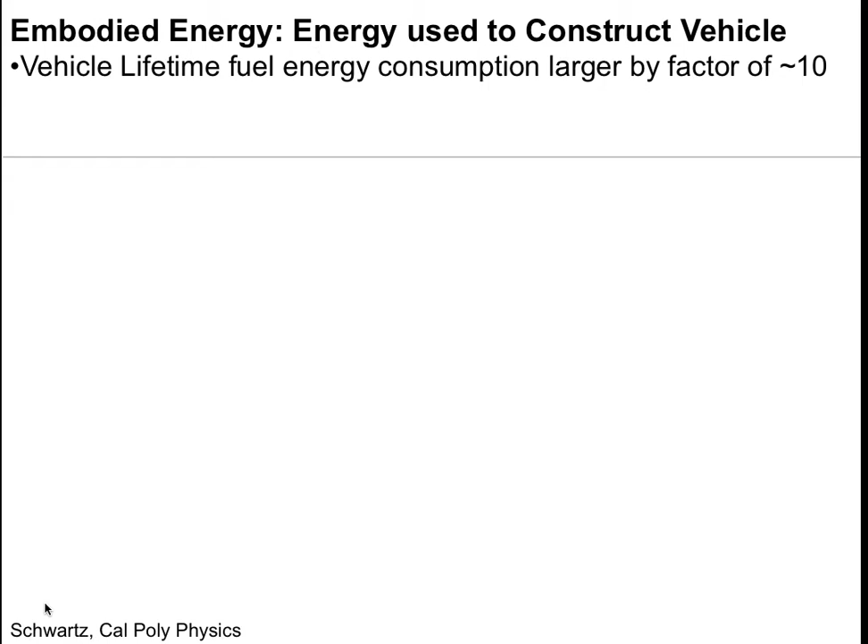So you're at the cocktail party, and someone says, I'm not going to buy a more fuel-efficient vehicle because I'm concerned about the energy used to make a new vehicle. This is called the embodied energy. But the embodied energy of your car constitutes a very small portion of the full carbon footprint of your automobile, 90% or so being due to the burning of gas. This is usually the case for all energy converting technologies such as a light bulb, a heater, or a motor. And the analysis shows here that the embodied energy is about equivalent to one year's worth of driving.

That is, unless you drive very, very little. Most people drive on the order of 15,000 miles a year. So what this means is if you drive at all, investing in a fuel-efficient car is going to reduce your carbon footprint.

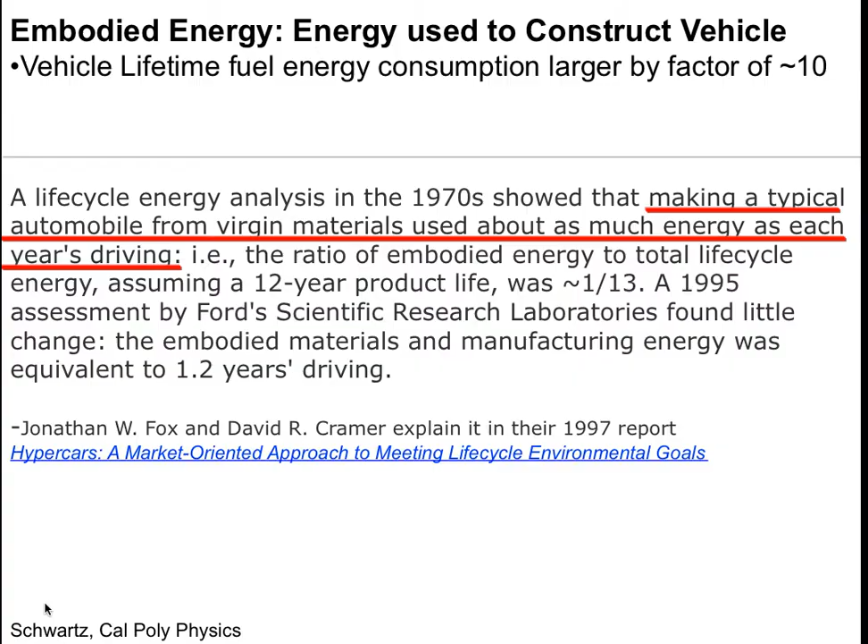So although the average car lives for about 18 years, its productive lifetime is about 11 years only. So if we want to get everyone to use electric cars, we're going to presume it's going to take about 11 years for most people to start using a different car.

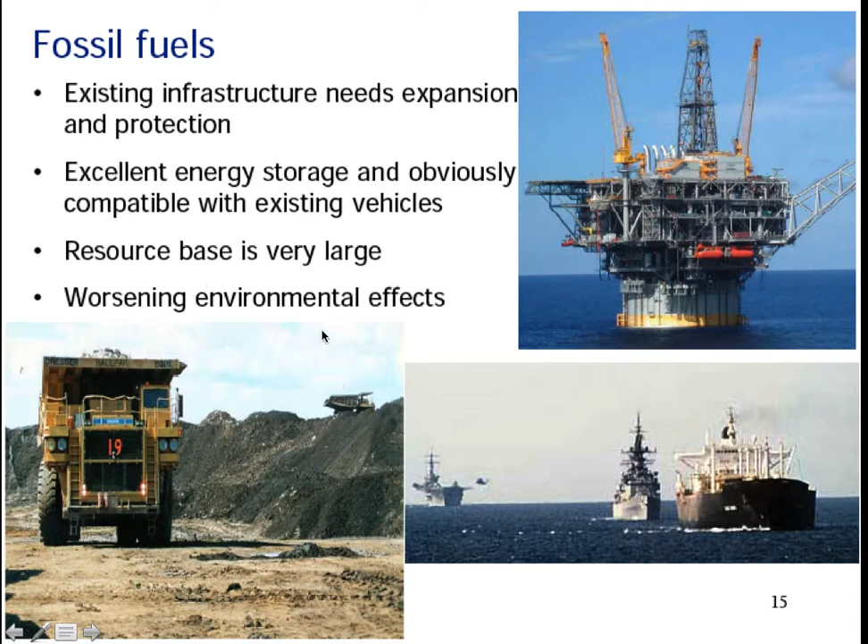Okay, so let's take a look at some technologies. What do we know about fossil fuels? Well established, works great. The resource base is large but dwindling, and there are a lot of environmental effects as we try to get that harder to get oil. This is where it all is. Most of it's in the Middle East, unless we consider the tar sands in North America, up here in Alberta. We've used about half the accessible oil.

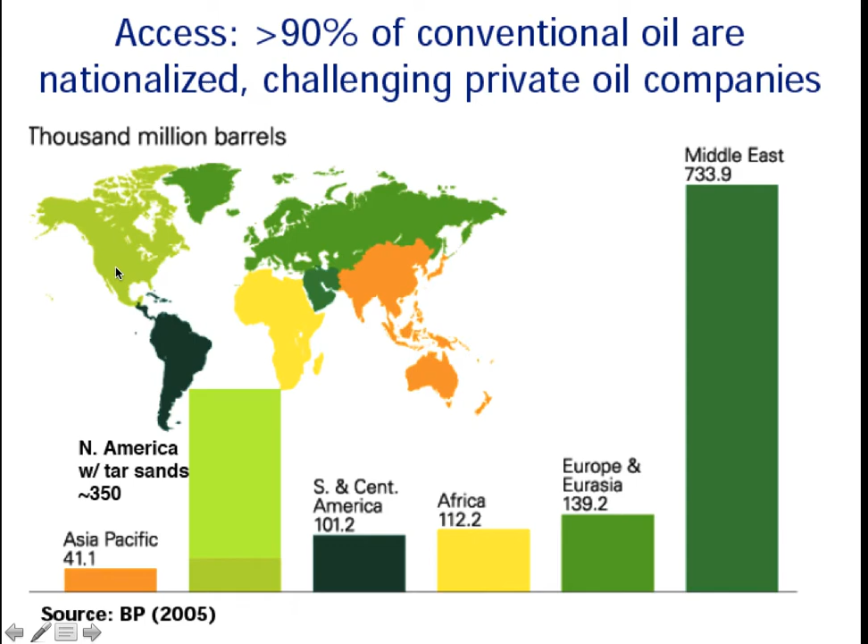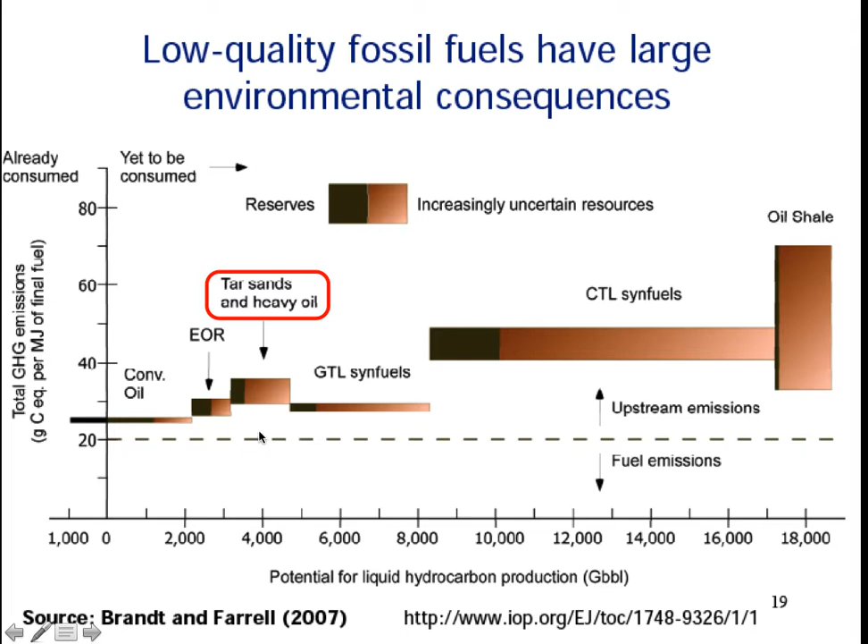We can extract oil that's more and more difficult to get to by using fracking, for instance. It just costs more, and it also costs more in the environment. Where we can see tar sands, the upstream emissions is more than half the emissions due to burning the petroleum after you've refined it. The United States could do more to improve the efficiency of the automobiles on the road.

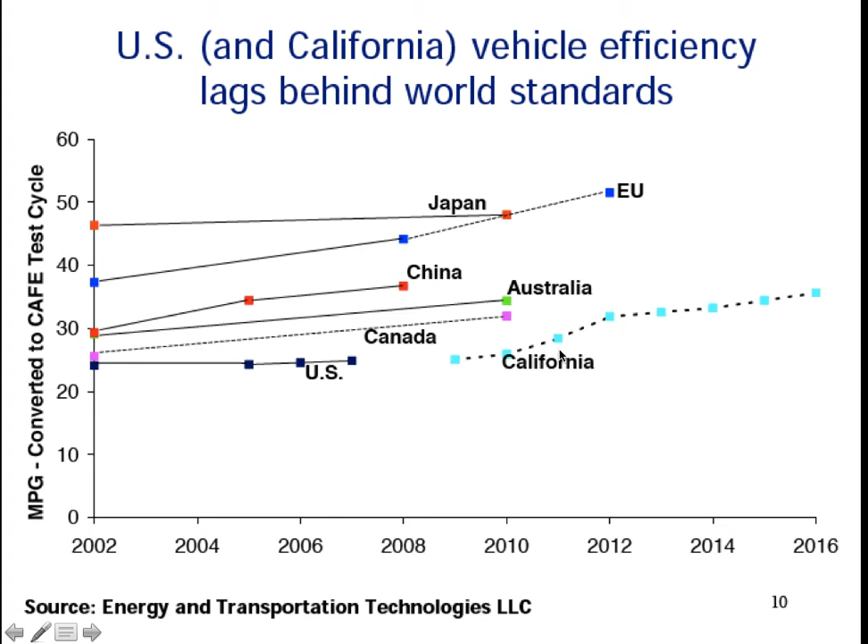And we see this is starting to happen in California, and the United States has since picked up since Obama was elected. Then you ask yourselves, well, if we don't make efficient cars, what are we putting our energy and time into? We can see here the green curve represents the relative miles per gallon. All of these graphs start at 1 as just a relative term. So we can see the fuel efficiency improved greatly around 1980 and then leveled off and actually even dropped. So where did all that technological innovation go?

Well, we improved the horsepower, we made the vehicles bigger, and we made them accelerate faster. And so if we want to, we can make much more efficient vehicles if we don't worry about being a muscle car, if the performance and the horsepower are less and the weight is less.

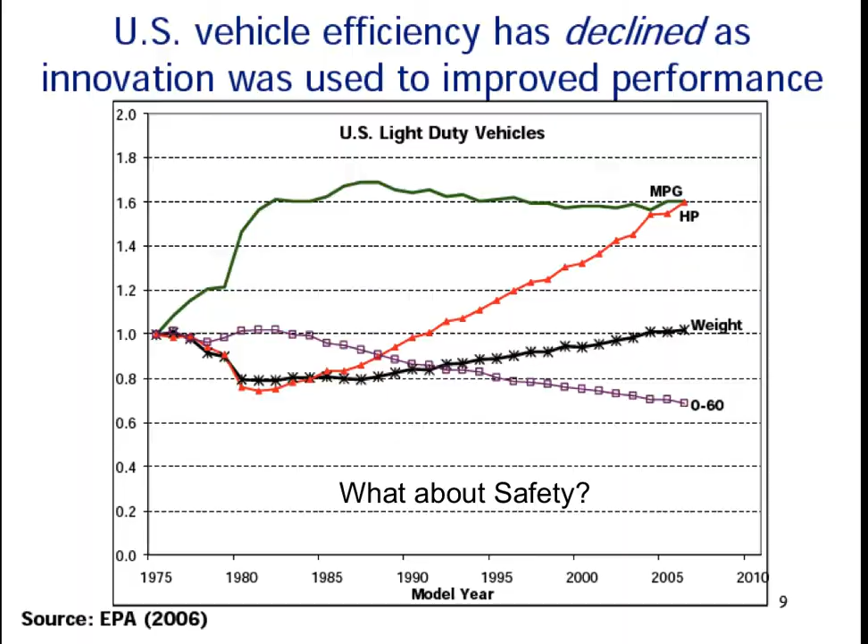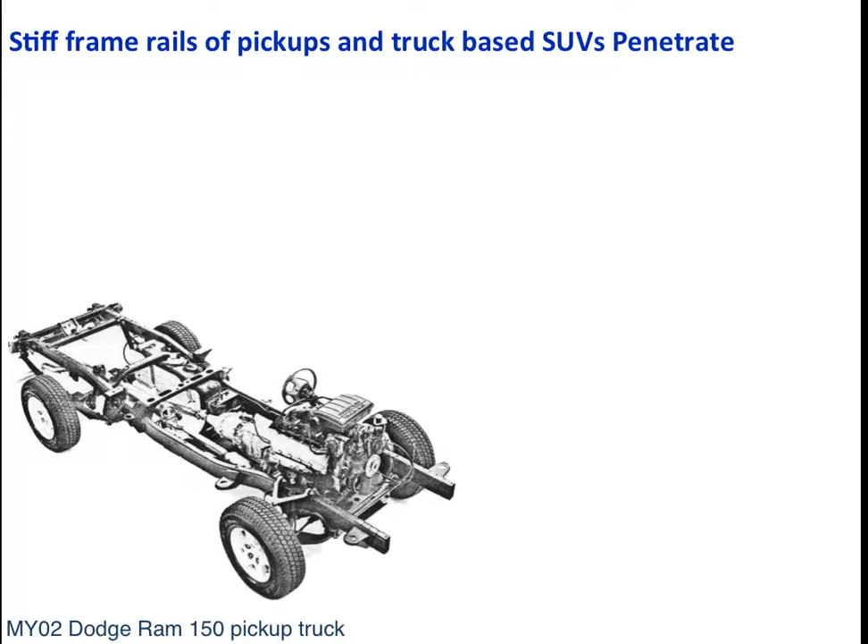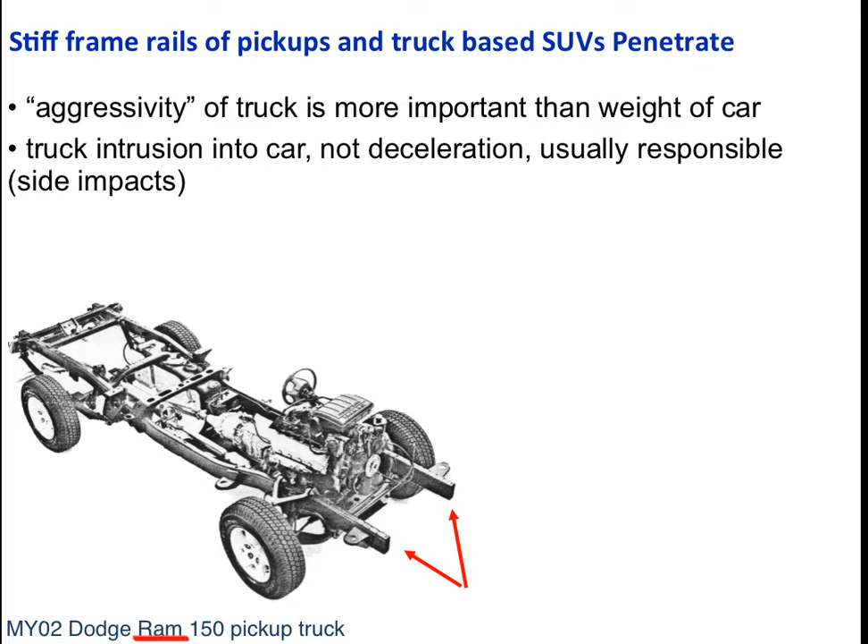And we investigate, why is this so? Most of the deaths are not actually due to deceleration, but because you actually get impaled by the frame that penetrates the other vehicle. What's interesting is the Dodge Ram—this is the frame. Take a minute and try to find your own car here.

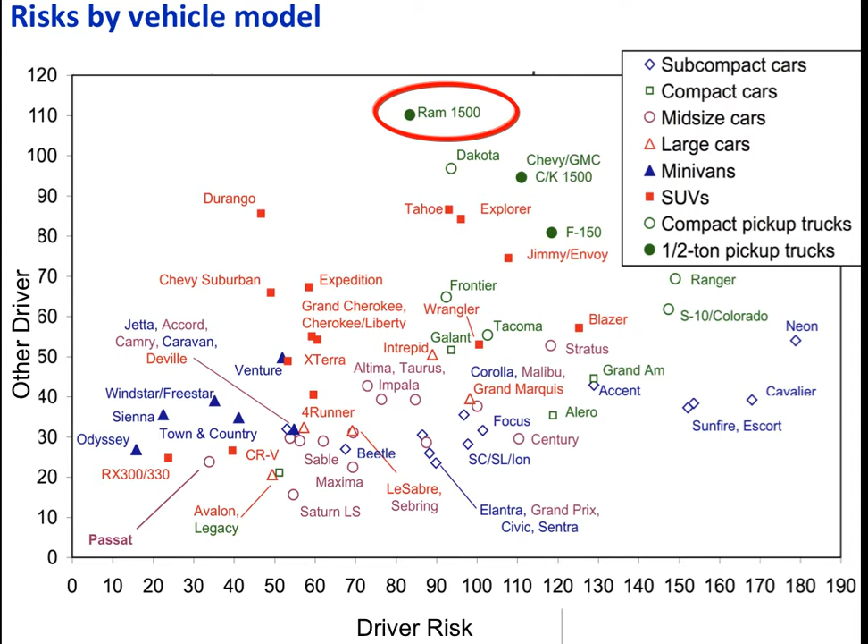So you need to store energy to drive a car, because cars require quite a bit of energy, and generally we've relied on liquid fuels. But batteries give us the ability to use electric motors, which are much more efficient with the use of energy than the internal combustion engine. There are 3 different kinds of batteries we'll look at real quick here.

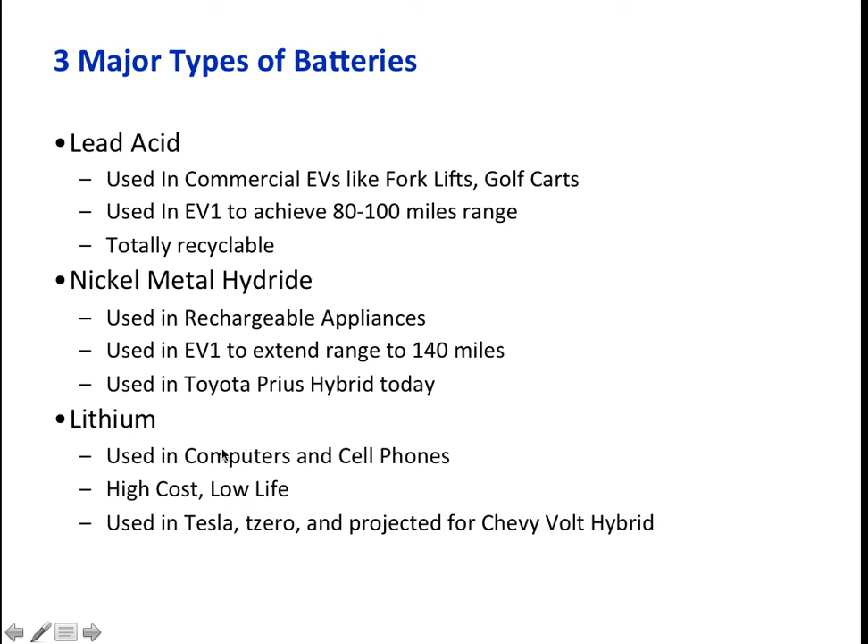This is how the batteries stack up against each other. The lithium-ion battery stands out for a number of reasons: first, it has considerably more energy density than the other two, but costs 10 times as much as the lead-acid battery. Although it doesn't last as long, we can have more cycles of charge and discharge before the battery's dead. Lastly, it's interesting because there are many different reactions that can be associated with a lithium-ion battery.

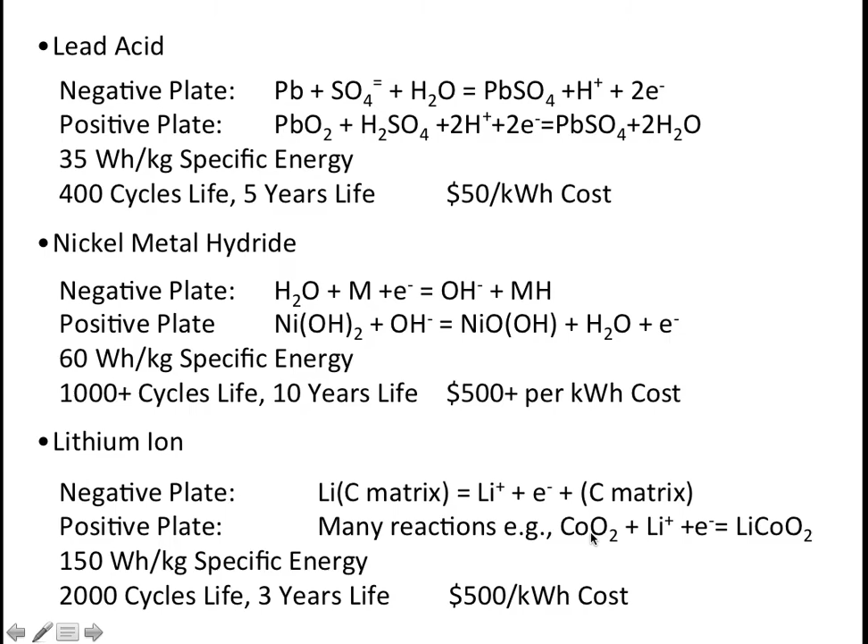A mobile lithium ion can move between the negative and the positive terminals. It has a lower energy state in a carbon matrix than it does in any number of compounds on the positive plate. Let's take a look—here the lithium is incorporated in this compound, but can break down, releasing the electron and moving through this electrolyte to become incorporated in a lower energy state with the carbon compound.

The electron is not free to move through this electrolyte, and therefore accumulates on this electrode and becomes negative. When we connect that up, we can drive current through a motor, for instance. It's rechargeable by means of driving the electrons backwards through a larger voltage, making this plate extra negative, which will attract the lithium ions back again.

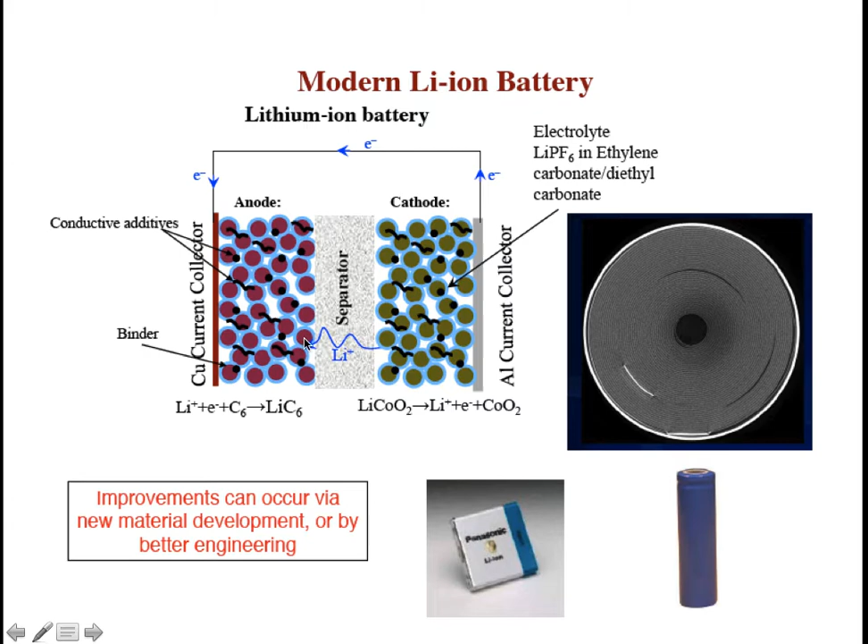We want all these layers to be very thin, and this surface area to be very large. We take that film and roll it up like a fruit roll, and our lithium-ion battery is a cylinder. If it's very thin, we can have a large surface area which allows a lot of current flow. The danger then is when the separator gets very thin, we can have a short between the two, which will destroy our battery. That's ultimately what kills your lithium-ion battery.

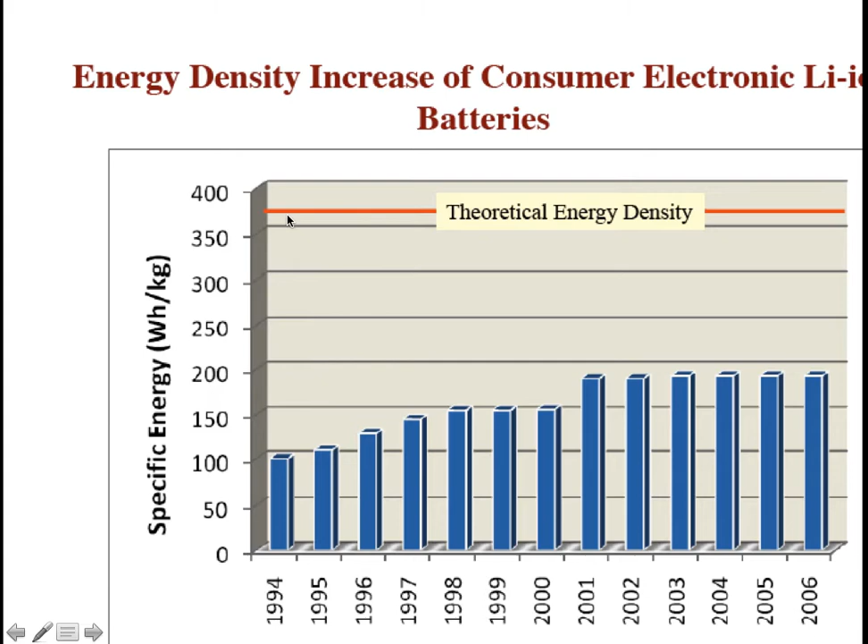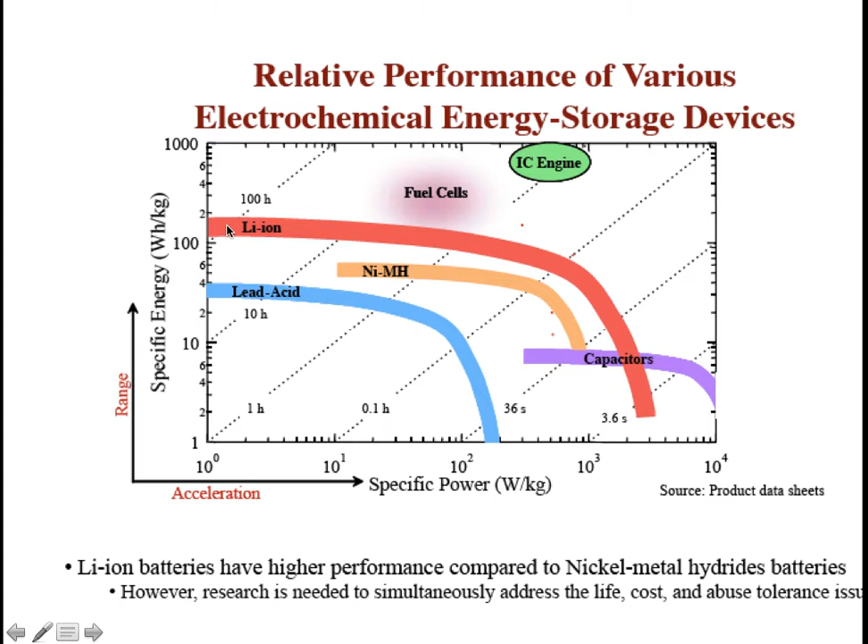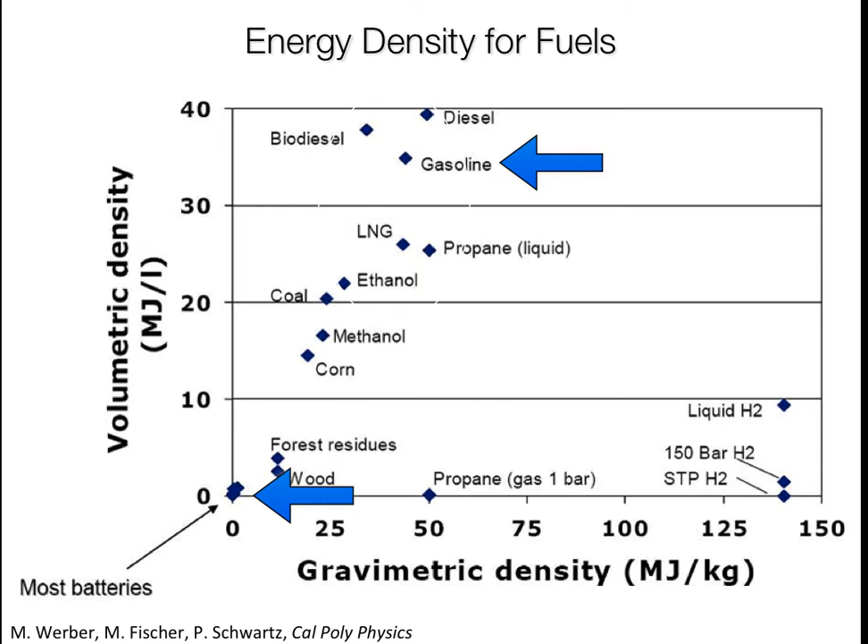It is very misleading, and so we did some research and published a paper addressing the issue of energy density. Chemical energy density is the amount of energy stored, how much heat you can generate per mass of fuel. But you can't drive a battery and you can't drive a gallon of gas.

You have to convert that thermal energy into mechanical energy, and you're going to need an engine to do it. So you need to multiply by the efficiency of conversion. Furthermore, it's not just the mass of the fuel you have to carry around, but the whole engine and transmission. The conversion efficiency for the internal combustion engine is 10 to 20%, whereas for electricity it can be 95 to 99%.

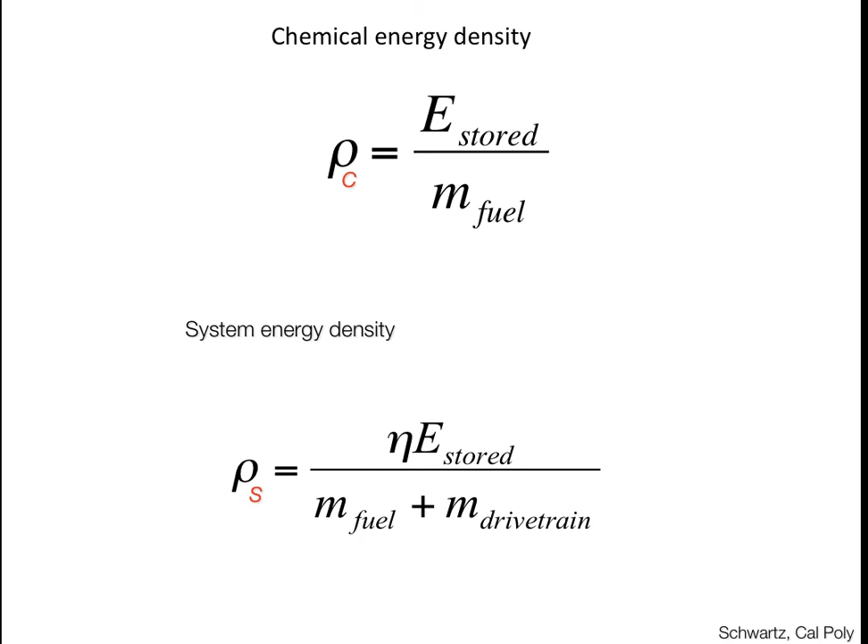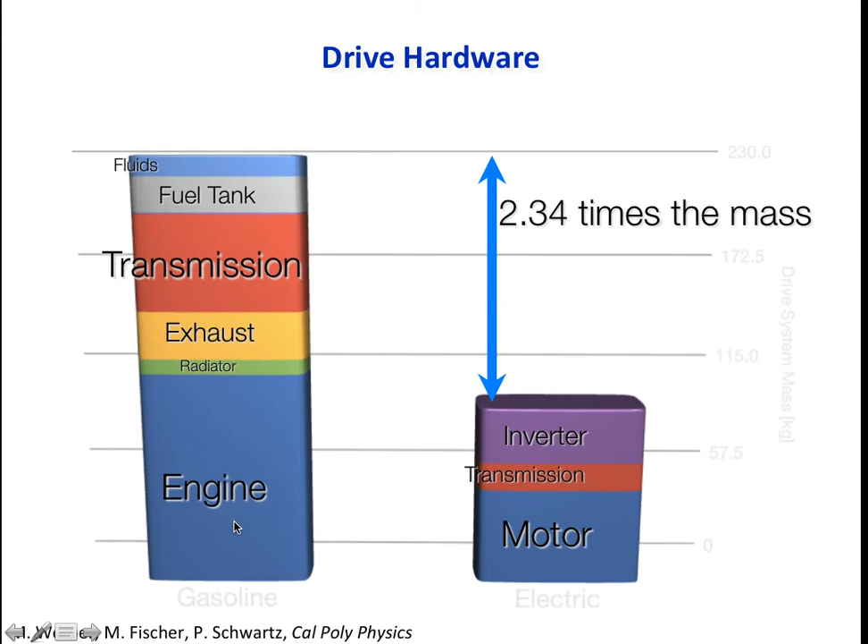Additionally, internal combustion engines have a much greater mass than an electric motor. For instance, the Tesla has a motor that's 70 pounds - you could hold it in your hands. So we compared the Lotus Elise to the Tesla Roadster. They're made from the same frame, almost identical cars, except this one has an internal combustion engine and this one has an electric motor and a battery pack. We compared the mass of the drive system and found that the internal combustion engine had a much greater mass than the electric motor.

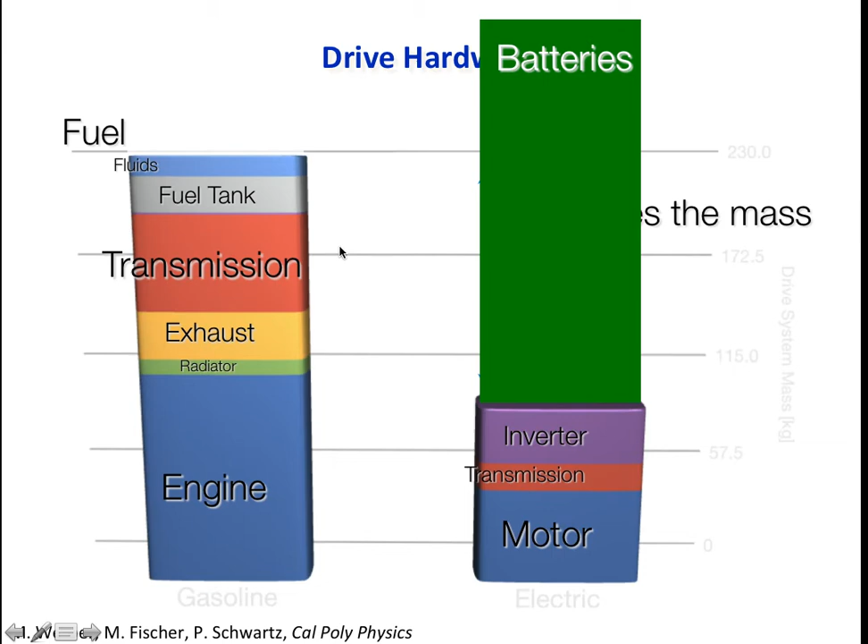The major amount of mass is carried in the batteries, but you can determine how many batteries you have, so your electric motor system could have less mass or more mass than your internal combustion engine depending on what range you wanted, how far you needed to drive.

The same result was found when we compared the cost of driving an electric car with the cost of driving an internal combustion engine. The major cost for an electric car is in the range that you want. If you don't need to drive 400 kilometers, your electric car is going to cost you considerably less to drive than an internal combustion engine.

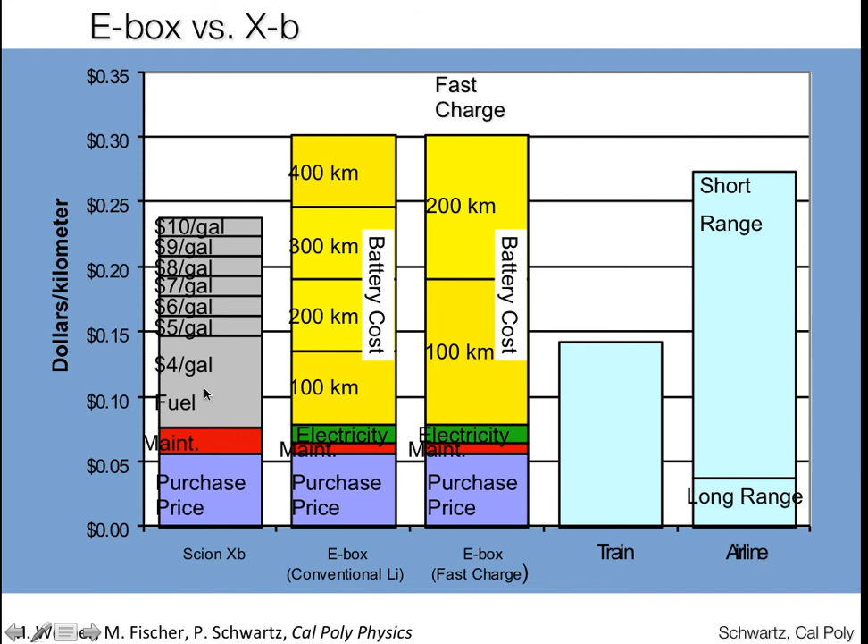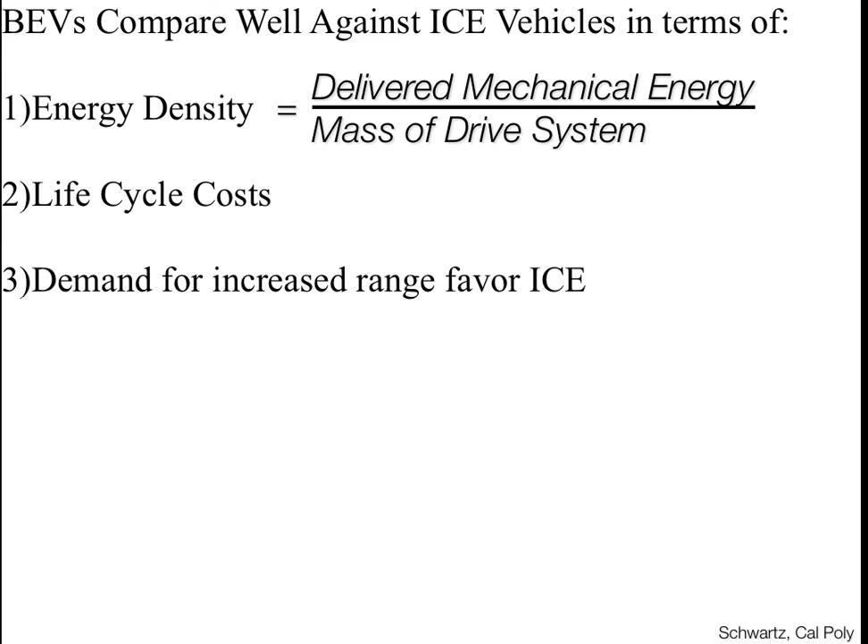If you need to drive very far, there are a number of other ways you could do it. You could take public transport, borrow a friend's car, or drive your other car, because Californians, for instance, would have 5 or 6 or 7 cars. So battery electric vehicles actually have a very good energy density compared to internal combustion engines. They have lower life cycle costs, but if you need a large range, if you need to drive very far, you're going to want an internal combustion engine.

Technological improvements are presently improving the battery electric vehicle, and we presently have a number of battery electric vehicles that can drive a moderate range. So what if we had more charging stations and could keep this large distribution of battery electric storage connected to the grid as much as possible? It would do two things: increase the range you could drive with your car, and it could use the cars as a dispatchable load and an electricity storage device.

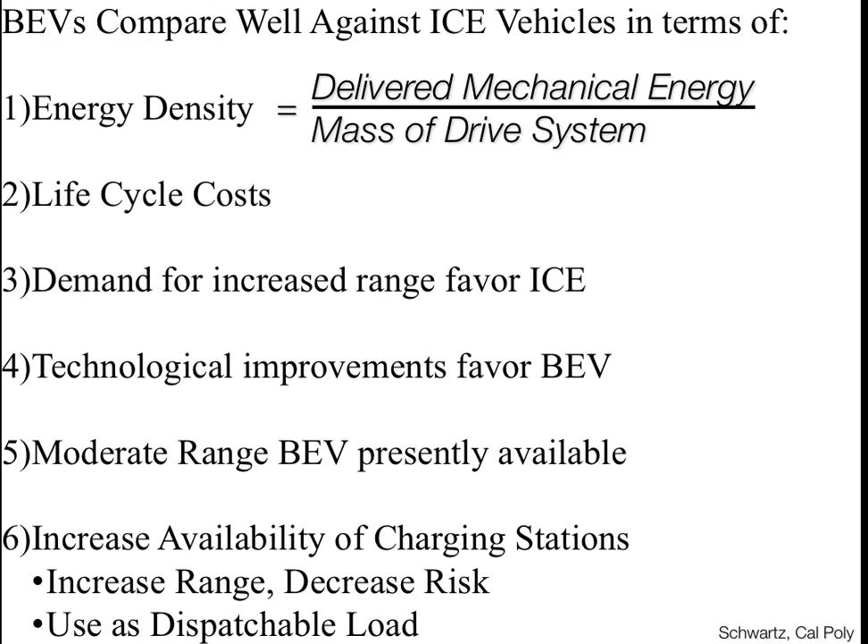Not only would this be great for the cars because they could drive further, but it would help stabilize the grid because you could actually pull some energy from the cars during the day if you needed it. For instance, if you had a large solar electric facility and clouds came over it and it dropped its production... Electric motors have very high torque at low RPMs, unlike gasoline engines, so you can get really good performance from them.

The EV1, for instance, was not a muscle car, it was an economy car. This is the car in Who Killed the Electric Car, GM's electric car that they destroyed. So it's just an economy car.

An interesting resource that now becomes very important is lithium for lithium-ion batteries, and it turns out that half of the world's lithium is in Bolivia. Bolivia is a very left-leaning country. The United States does not have a good relationship with Bolivia, so we have a similar situation to Arab oil countries that we don't get along with.